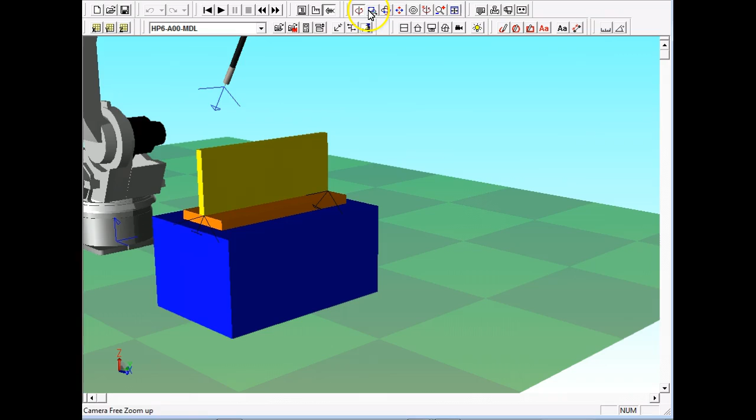This is the work cell that y'all are building. I don't remember which robot it is, I could go look. And then we're building a work stand and then a work piece that we're going to put on top of it.

Originally, you're going to build a torch, and then you're going to import a model or import a torch, right? It's already there.

Then what we're going to do is we're going to start programming this thing to do a weld. We're going to have to modify the procedure a little bit because of how they built it. They wanted the work stand to be up at 600 millimeters, and we dropped it down to 300, right? And then the way they teach it, they teach you to put a weld point right here.

And of course, if you go from here to there, guess what you're going to do? You're going to go right through the workpiece. So normally, the way we teach it is we'll teach our start position.

It's going to be a start position where we're just going to take the tool and rotate it down to 90 degrees. And by the way, there's no guesstimating about these angles on MotoSim.

So what we can do when we bring up this right here, this is our teach pendant, and this button right there allows us to look at the position of the robot. This is pulse, so this is actually the 0 position for this robot. So if you ever want to go back to 0 position, you can just come into pulse and hit 0 and just tab through them like that, and it'll pop that robot right back up to 0 position.

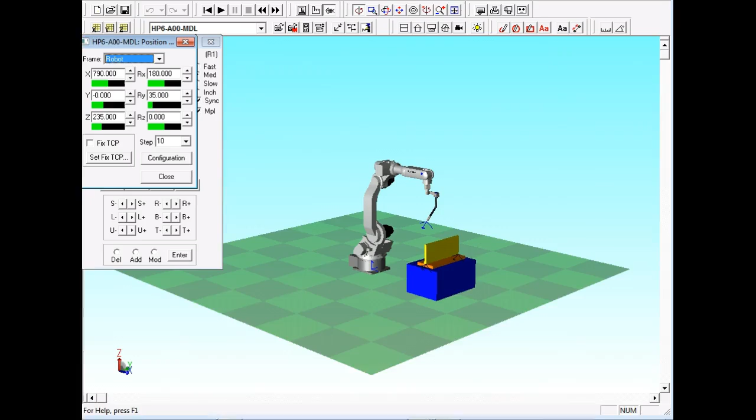So to set the tool center point, I'm not even really sure if you can teach it on MotoSim, but you can import it.

So later on, when we get playing around, we're going to move over to the HJ3 robot. And what we'll see is that we go over there and we can download the parameters off that robot. So what that means is that if I teach a tool over there, and then I model the same tool over here, then I can go over there and teach it over there and download those parameters into MotoSim, which is pretty neat. So we can literally teach a tool over there and download it into here.

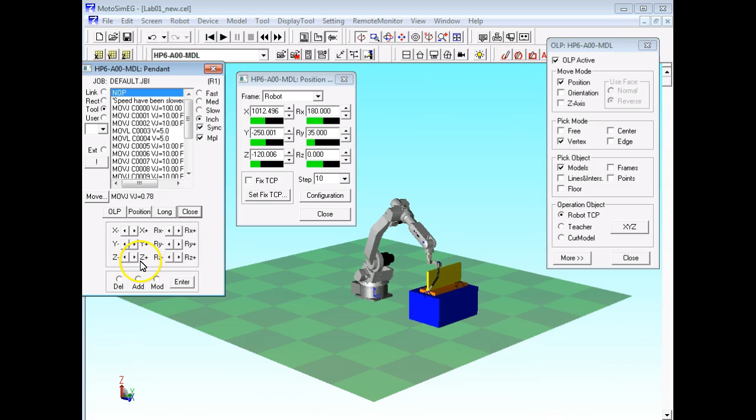Then I would go to slow to inch, and come over here and go Z minus. So now it's going to come up relative to the tool. At this angle right there, it came up like this.

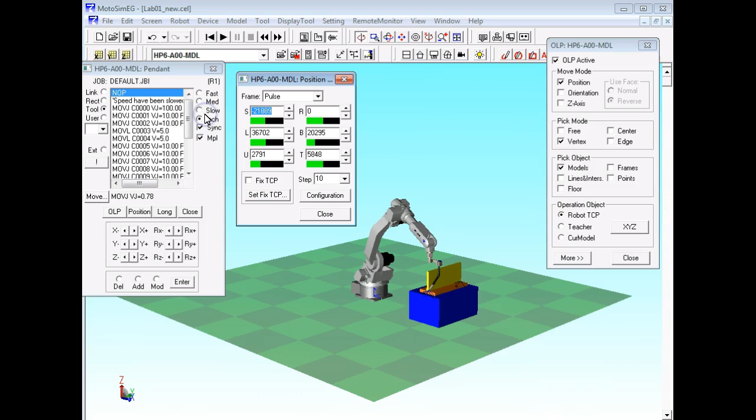Another thing I wanted to make sure y'all understood. I want to go back. I'm going to go to pulse. What am I going to do? Hit the zero tab, and I can set the robot just like that. Remember that when you're trying to teach what we call the start position, because this is the start position, it stops from tearing up stuff.

What do you mean tearing up stuff? It's a simulation, without simulated collision. Oh, it would collide. We don't care. We would care over there, but I don't care over here. It's not going to hurt anything.

But that was a simulated back out. No, it was just a simulated setting it back to zero. Yeah, but it didn't run through nothing. Well, it could have. The way you did it, though, it didn't. It might not have, but what I'm trying to say is I could be anywhere. Let's say I come back here and I'm sitting way over here for some reason.

So let's put it back on rectangular jog, and let's just send X out plus. Let's take it off inch. We'll do this. Okay, then we'll bring it down Z. Well, yeah, I collided, but it's not going to hurt anything. What I'm trying to show you, it just brings it out.

So if I go like this, did it collide? I don't know, I don't care. This is a simulation, you understand what I'm saying? Now, if I was to do that over there, that's going to cause problems. But over here, it doesn't cause problems. So, getting it back to the home position.

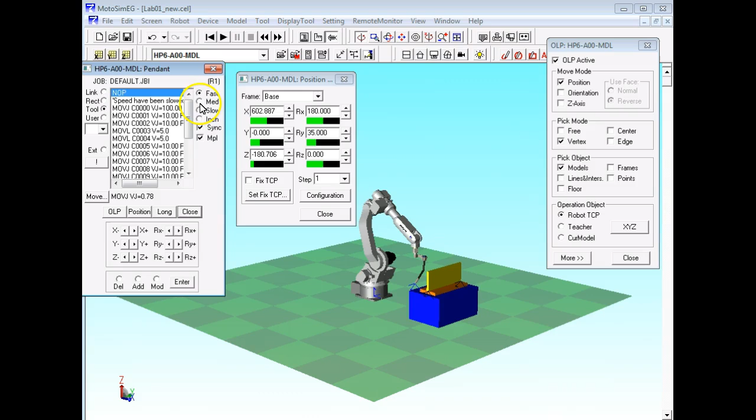Go ahead, Kathy. Yeah, inch or slow, or click it. Fast is going to move in pretty good increments. So if I come over here and say plus, I can hit it one at a time. You'll see what I'm doing, but it still moves in long distances, even if I do it by just hitting it. Then I can come over and go to these slower speeds.

You can see it's actually doing it in increments. Can you see that? It's just that when you go slower, the increment gets smaller. Or if you just hold it down, it's going to keep doing it. So it's just like y'all over there. So when you're trying to get close to something, you just bump it a few times to get it in there. You put it on slow, but still you bump it to get it precise. Are we okay? All right.

So how would I teach a point? I'm going to go over here, go from start again, and take all this off. And how do I open a new program?

No, that's a new cell. We're going to do a new program.

So I'm over there on that robot over there, very similar to what we do over there. So what I'm going to do is go to robot, go to controller, and go to select a job. So when you install MotoSim, by default it puts a job in there called default.

And then right here where it says now, MotoSim jobs get a job on the computer gets a .jbi extension. We talked about extensions a little bit, right? And that's why we turn them on when we run MotoSim, so you can see these extensions.

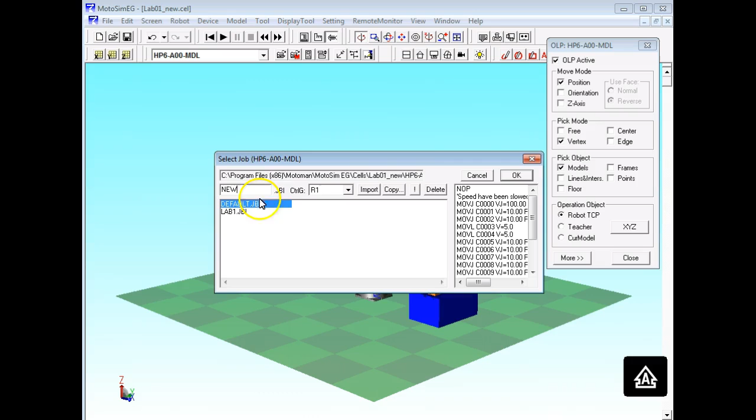And then it jumps back here. I bring up my controller and see my controller is basically blank. These two instructions is what we get automatically. Normally when you start a program, it's got to have at least one thing, it's got to say where the program ends, right? So every one of these robots, normally the last instruction is automatically stuck on there called end.

They might call it a little different. Motoman puts an instruction at the first, we called it a no-op instruction. That's no operation, so it's a valid instruction.

Okay, so what I want to do here is go back to pulse and zero this out so I can teach my start position, right? Okay, now how do we teach a point? Well, yeah, okay, we can do that. So let's say this is my start position. So normally how do we move to our start position?

Real fast, right? We move to our start position fast because we're not near anything. So what we try to do is if we're not near anything and there's no collisions and we don't have to be precise, we're going to move that robot as fast as we can, right? Y'all understand?

So how do I teach a point? This is what you're going to do when you take the test usually. You're going to start a work cell, import a robot, teach a job, and set up collision detection, which we're fixing to get into. So how do we teach a point?

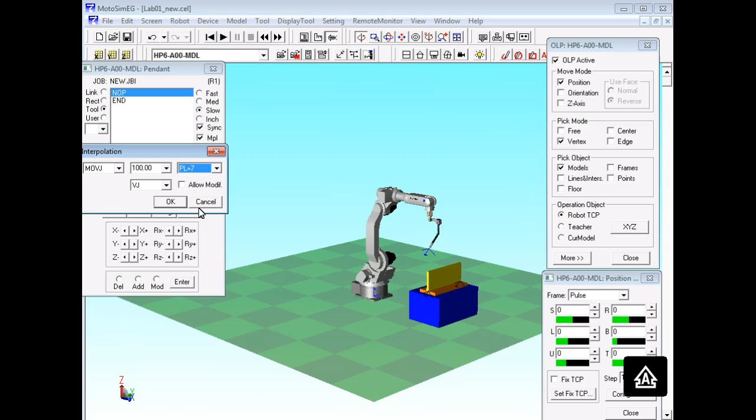This one I don't care, so I'm going to set it at 7. This has got an 8, but I don't think the robot has an 8. So let's click on OK, but that still hadn't taught the point. What do we need to do? This is just like the Motoman. Hit add and put enter, and it pops the point in there.

Then what would I do? I would jog the robot where I want to go. So what we got to do, first of all, we can't go from here to here, and y'all see why? It'll collide. So what are we going to do?

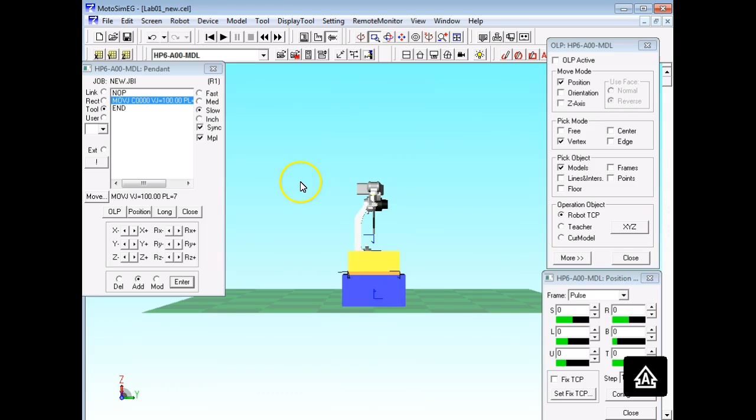We're going to teach a staging point, so we'll jog the robot out. This don't have to be extremely accurate. So what I'm going to do real fast is just spin it around so I can see. Let's look at it from the other side. So y'all know how to get different views, right? They show you 4. You can hit on the little camera and get a lot more views that you can look at.

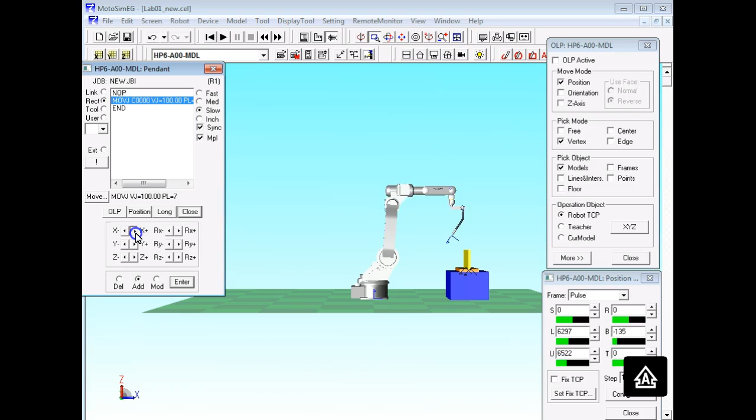So I'm going to look at it. The standard view is this one. So what I want to do is jog it out till it gets past this top right here, this vertical here. I'm going to go plus X and move it out. No, we don't want to go down yet, because if you teach a point down, you're going to collide. This is where I want to teach a point, but I want to teach it pretty close to where I want to end up at, right?

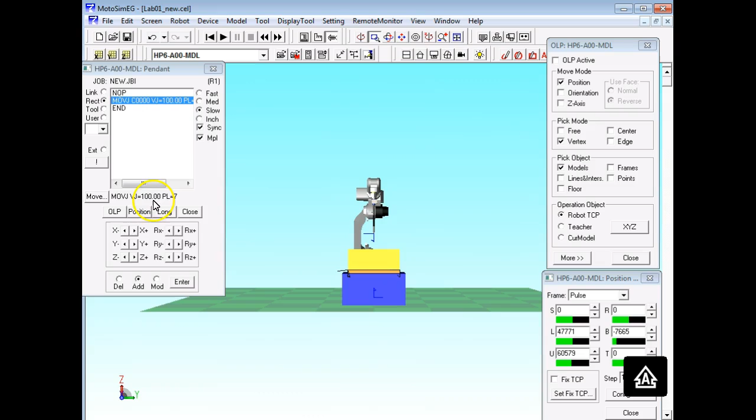So I'm going to move it to the front, and where's our first weld? Our first weld is going to be right here. So I'm going to go over here, jog it to the left, minus Y, and move it over till it gets pretty close to lined up. We can zoom in to get a pretty good picture. This is the way we zoom in right here, right? Come up here, just box in what we want to do.

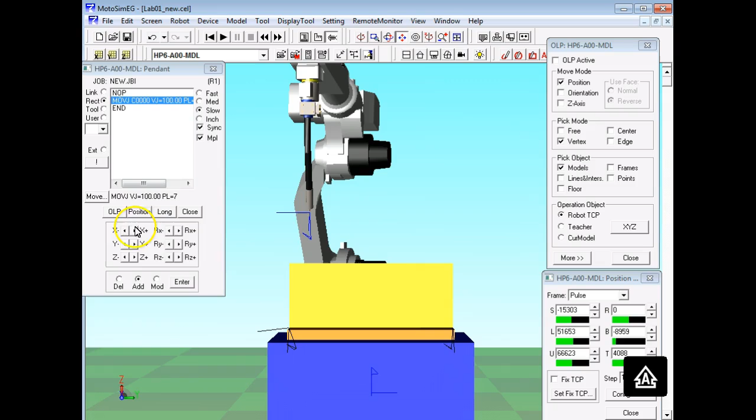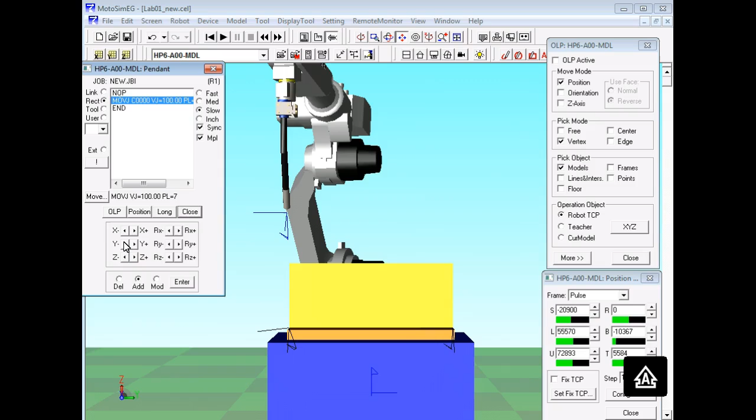Okay, so it looks like I want to go a little further, right? And that looks pretty good. So what am I going to do? Roll it back, turn the picture so you can see if it's clear. Oh, we did that first, that's a good idea, but all I did was go Y. So my first thing is I checked to see if it was cleared, right?

You understand? So here, don't look here, look right there. Here's the tip right here. Is that cleared? No, it's not.

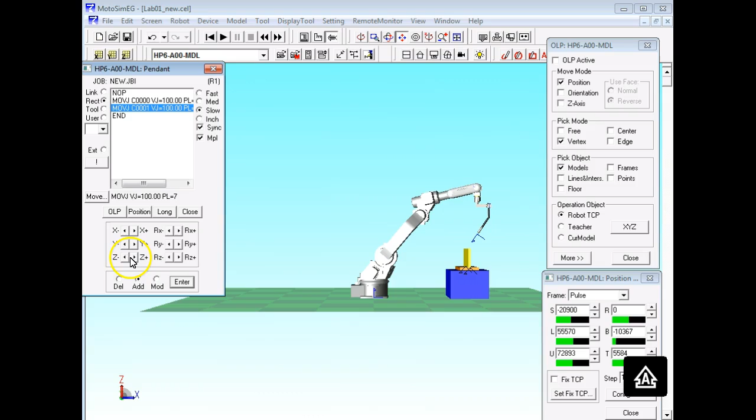So here we're going to add a joint move. I'm going to add a joint move right here, all right, 100%. Then what do I do? Then I'm going to bring it down minus Z and stage it.

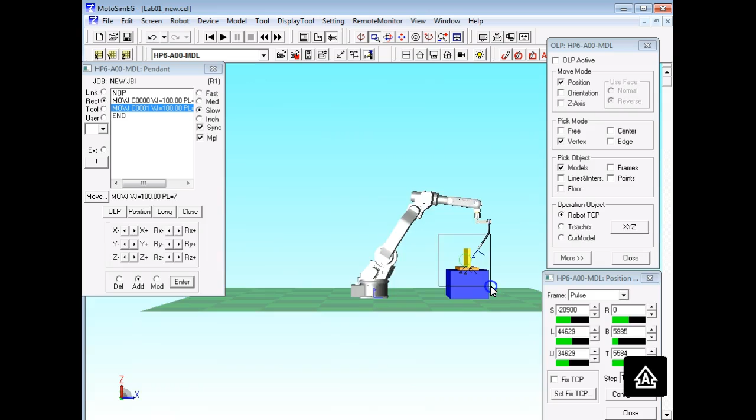By the way, let me bring this in right here. What we have the ability to do, they call it teacher - we have the ability to pre-teach points. And let me zoom in, and you can see the frames. These are the teacher frames here. See them? This is on this corner, and this is on the other vertex right there. And notice we have the angle of the torch set. So not only can you pre-teach the point, you can also pre-teach the angle that you want the torch to come into.

So we're going to come in and bring it down just a hair, so we can line up - what I'm trying to do is line this up with this right here, right? Or close.

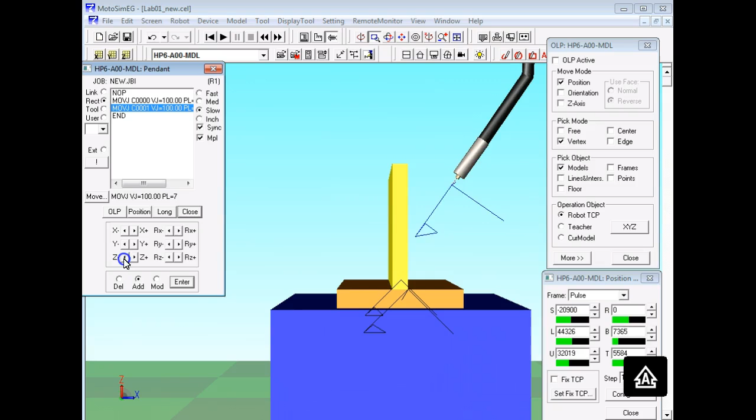That looks like a pretty good staging point. So what I'm going to do is teach this point. We're going to use a joint move, but we want to hit this point because we don't want it to start curving, so I'm going to set it to position level 0, and then I'm going to add it.

This looks like a good staging point. You might want to teach a staging point a little closer, but we're going to do a linear move and it comes straight down, right?

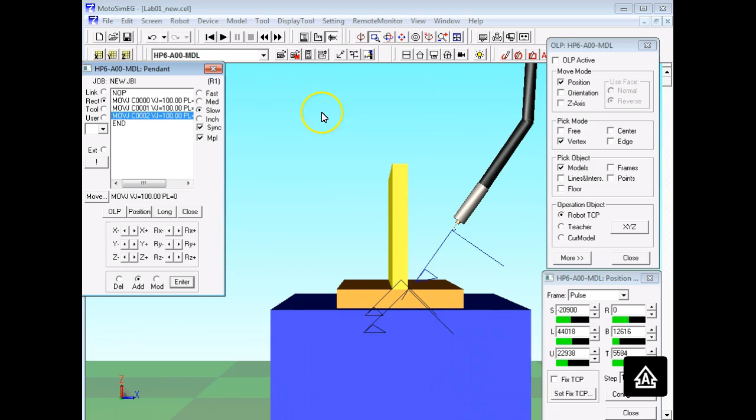So what I'm going to do here is I've got my torch lined up and everything. I'm going to swing it around so I can see the front again. I'm going to come up here and turn on OLP, and zoom in. This is what's so neat - I can just come over here and turn it, make sure it's on.

And then I'm going to come up here and hit this point. I've got it set up for the vertex. Come over here and just get close to that point and it goes perfect. That tip is actually touching that point.

And then I'm going to come up here and change this over to a linear move. Change the speed to whatever it's in the lab to set it at - 11 millimeters per second is okay. And this is, we're going into the work, so we're going to set it to a position level of 0. Come in here and go okay, and then we'll add that.

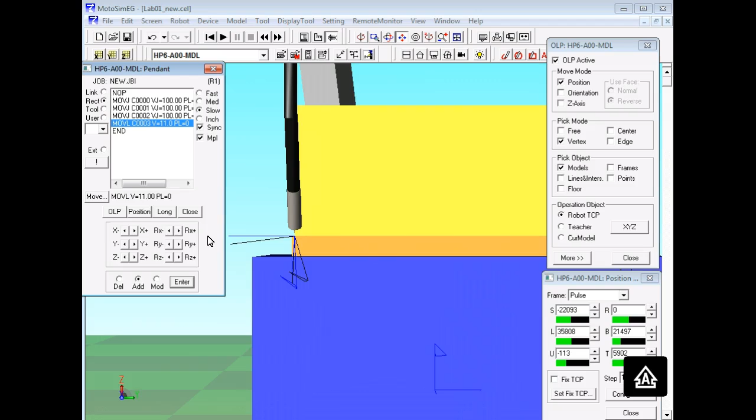Then what would I do? I'm going to move it over here. Try to move it over here, guys. Turn off OLP, I'm going to come over here, come down, turn OLP back on. Get right there - came to the vertex there.

And what I'm going to do is set my speed. Make sure my speed is what's required, and teach the point.

Now, on the real robot, what we would do is we'd back it out, move it over, and bring it down a touch again, right? But this is not a real robot, so we can use the OLP.

Now, what would we probably do? We would probably back it out and then bring it up. But what we're going to do, I think in the next lab, is back it up, spin it out, spin the torch around so we can weld on the other side, bring it in, set it down, and weld the back side. So that's what we'll finally end up doing.

So when you're going right down the point, you're just making a little spot on each point? No, we're welding. I didn't say back out. I said, what's this right here? I'm going to open this up. What's this? That's a linear move right there - that's where I taught that. Did I back out? Did I tell my robot to back out between that point and that other point? No. So don't get confused between how you jog the robot and what path the robot is going to take.

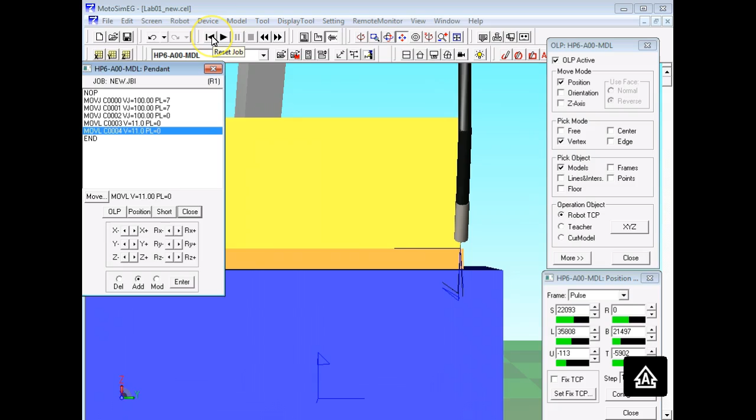Notice what happens when I hit this button right here. Program resets to the front. So let's swing it out a little bit so we can watch it. We'll put it at a sort of an angle, and then I'm going to zoom in, and I'm going to hit this.

And we just ran the program.

And what's so neat is, if we had this robot here, and we had that thing over there with exact dimensions—the dimensions got to be exact as your model—we could literally take this program and go over there and upload it into that robot, and it would run. We'll see that when we get to the robot.

The dimensions we give in the lab—hopefully y'all have this built already. So when they told you, we gave you the dimensions, right? We changed the dimensions of this because the robot can't reach over it with this torch on there. The robot could reach over it, but it's got this big old torch. All we did was change this from 600 millimeters down to 300 millimeters. All the other dimensions were the same as in the lab.

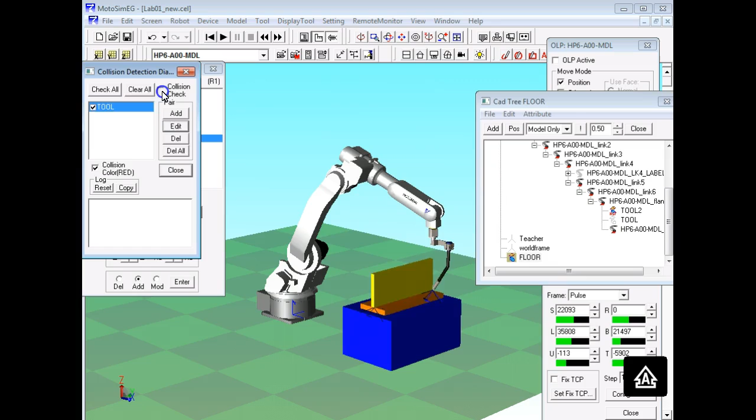Are we okay? So what we got to do now is come up here and do the collision check. Right now it says I'm colliding with that. Of course, we knew that because the wire is touching, right? So sometimes you're going to get collisions, but they're collisions you anticipated.

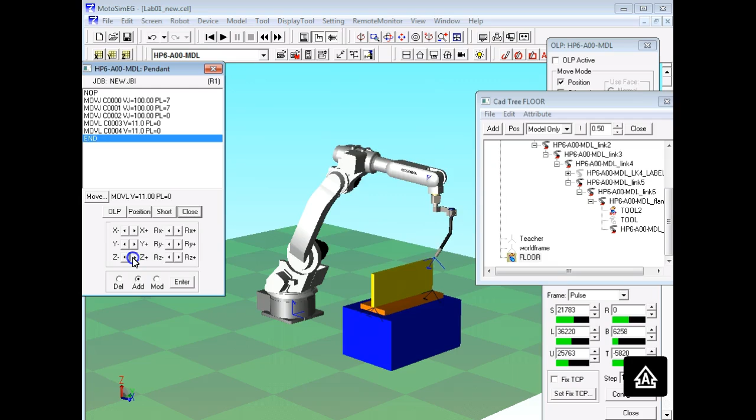Now I'm going to jog it plus X. Now as soon as I do this, I need to go minus Z. So now it's not colliding. So now I should be able to come up here. And if I touch something, let's go minus X. As soon as it touches, what?

Okay, so what we're doing here is a collision in a simulation. What did it hurt? Nothing. But if we create exact or precise models, that means if it collides over here, it's going to do what? It's going to collide over there. But what we can do here is see if it collides, right?

So if I send it somewhere and we see that thing turn red when it goes over there, we know it collided, and we're going to have to adjust our path. But we do that over here, we don't do it over there, which is pretty neat.

So that's what we call collision detection. It's not that hard to set up. So what do we use? Use this right here, use two things. Use this and also use that.

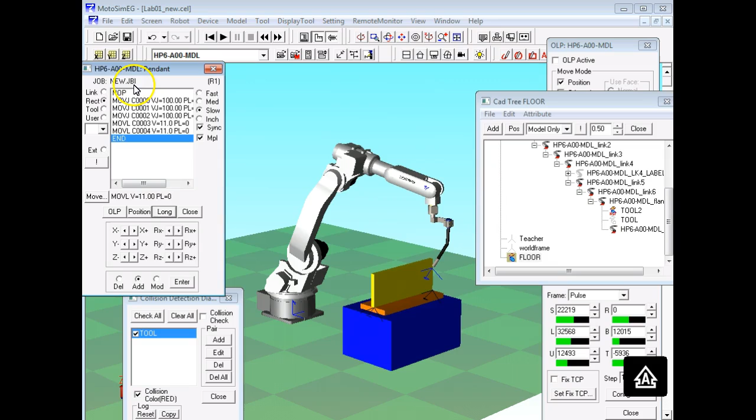And of course you can always turn it off. By the way, this is built into the robot. So if we jog our robot, let me take it back. I'm gonna take this back to short so I can get my stuff back. I'm gonna go to link, and what we're gonna do is start spinning this guy.

Oops, wrong thing. And when you see it turn orange, you'll see it. What they're doing is we have it set for what it means. It don't really mean you collided. What it means is we're at 95% of the maximum motion of the robot.

Are we okay? Any questions on that, collision detection? So we showed y'all how to teach a point. Everybody okay on teaching a point? We told y'all how to play the program. By the way, single stepping, all you do is put it up here and do this. Go through that. That's all you do, use your arrow control keys on your keyboard to step it, or you can come up here and click on a point and it goes to that point.

So here, we literally have to single step, right? You understand? Over there, if I want to verify that point, I can just click on whatever point, or I can just go forward or backwards in the program just by using the arrow keys.

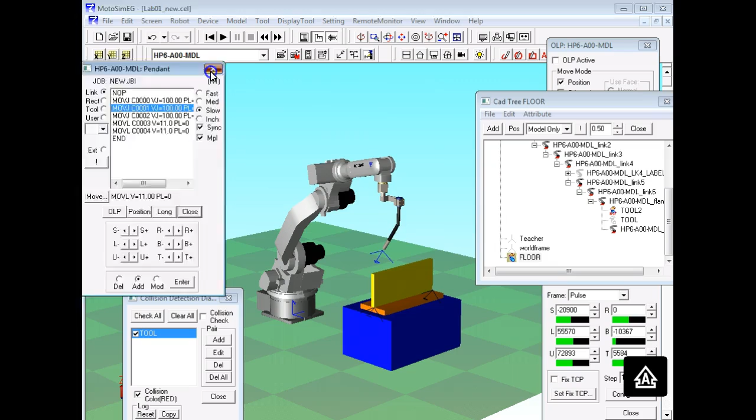Y'all know how to create a program? Where do we create a program at? No, robot controller, select a job. Okay, notice that job is in there. I can come back and go back to here. Oh man, I lost my lab 1 job. I don't know how I did that.

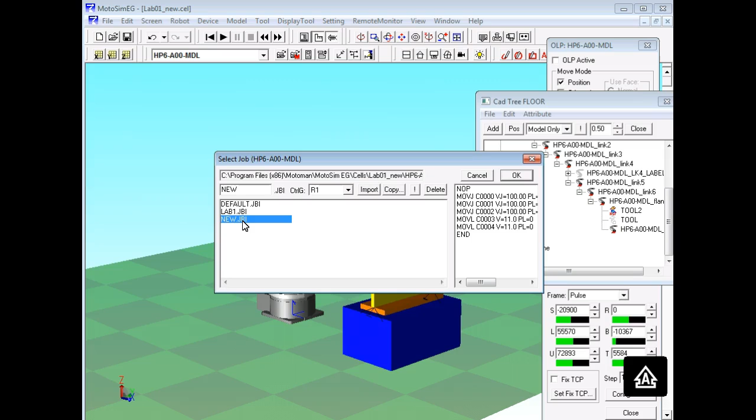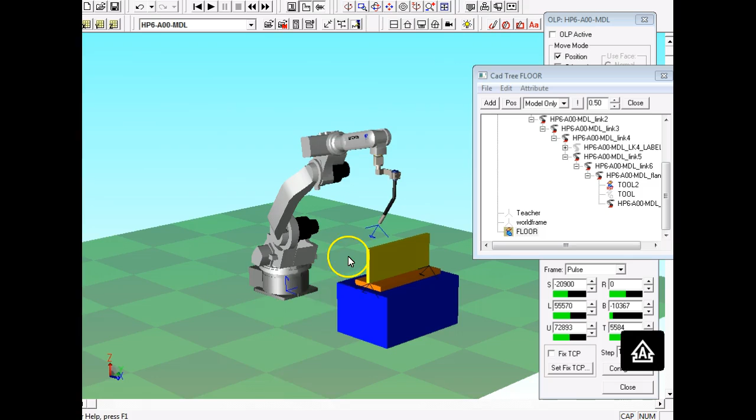Later on, we'll show you how you can actually see the jobs. In fact, I'll show you that now. Let me shut this back down so I can get to here, just to show you the information that's recorded in a job. I can't get my taskbar to pop up. There we go.

So when you actually write a job, this is good enough. What extensions does the job have? JBI, right? I'm going to go inside the robot folder, and there's the job right here. Normally what we have to do is open this with a text file, so we open it with this, and this is actually the job. This is actually the true job.

So what I want you to notice is that right off the bat, the tool that you have selected when you teach that job is part of the program. So that's why you can't go over there and select a different tool, right? Does that make sense? These are all our points. These are the actual encoder readings of the points. And then this is the actual program right here.